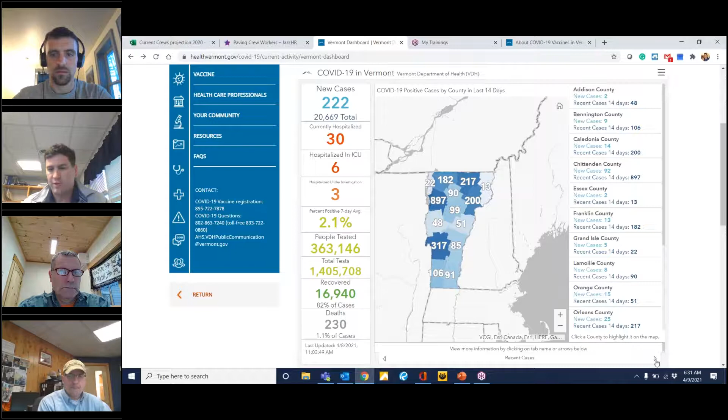Again, anything COVID related, please let us know. Our activity moves very fast. We had like 61 the other day, and then yesterday they reported 222. So again, we just need to follow best practices. The virus is still very active. Just keep up the communication. We're doing a really good job - you have a little situation, give me a call, and we'll come up with a game plan and figure out how to move forward with all the best information and guidelines that we have to follow.

So there's the last 14-day total. You can see we had some peaks and valleys there.

So this week's code of conduct is to strive to maintain a positive and professional image of ECI, of our clients, and of our employees - our employees, our clients, vendors, and some contractors into the public.

Health and safety news, again, excellent job - 7 days without a recordable injury, so we're up to 127. Excellent job this past week. We're doing a really good job with the morning briefings, the JHAs being completed and filled out. And every project that I went to this week, everybody was operating in a safe manner. So keep up the good work with our project site hazards.

This week we wanted to expand more on utility strikes, dig safe, and utility prevention. Again, follow all those best practices that we talked about last week. Make sure that we maintain our marks - we do have marks on the ground. Maintain those marks by refreshing the paint, creating offsets. Again, following that 18-inch tolerance zone, we need to make sure we hand dig to locate and visually see those utilities before we start excavating within 18 inches.

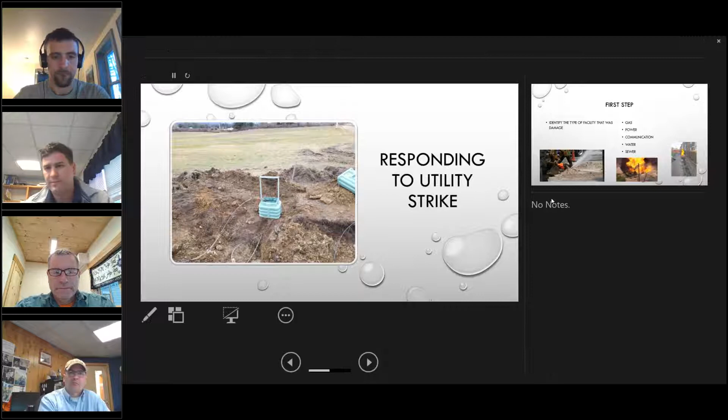You can expand the screen or show the next slide view. Oh, okay, yeah, I'm gonna unplug this. Okay, let's try that. How's that, Ken? Is that better? Yeah, it still shows - it's not really the presentation part. There you go, that's it. Yeah, thanks. Yep. A little rusty doing the safety meeting back in the office.

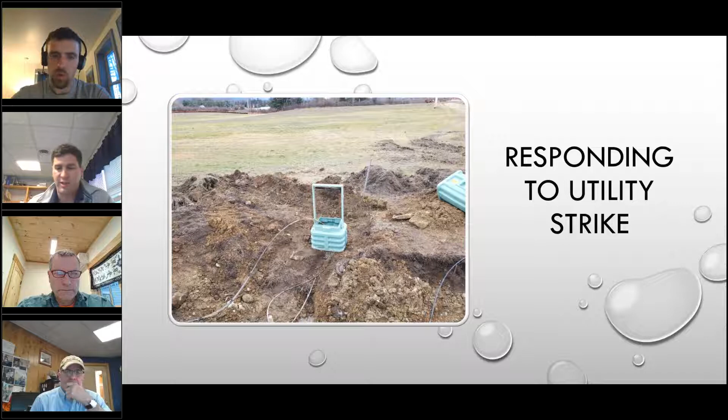Okay, so we've all been part of some unfortunate events, and that's usually what we see - operations kind of get shut down once a utility strike happens. So what we're going to talk about today is responding to utility strikes, how we want to conduct in a safe manner, and also the most effective way for reporting these things.

The first step is to identify the type of facility that was damaged. Most of the time it's pretty easy to know because there's potentially a physical hazard that relates. With a water line, you're going to have potential water in the trench that could create a very unsafe condition in the trenching operations with cave-ins. With gas, there's a chance for explosions. With power, there's potential for explosions. Communication, there isn't really that type of physical hazard to worry about - it's more that we're shutting down people's broadband and creating an issue for the public. And then the same thing with sewer.

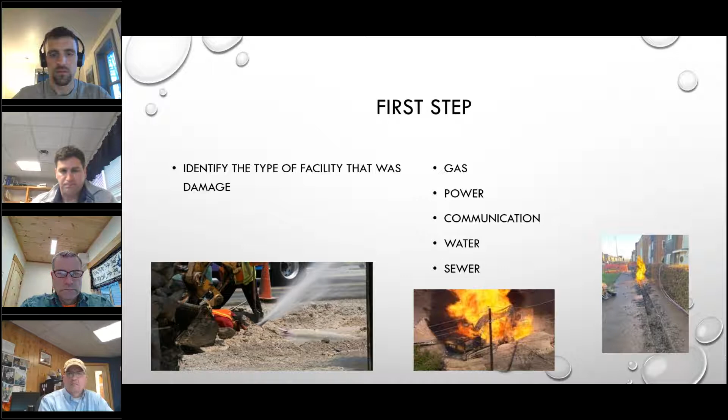So the first step is to identify, and then we're going to talk about our prevention and response. With gas, if a gas line is leaking, move a safe distance away and call 911. If you have the contact for Vermont Gas, call them. Working in Vermont, if we're working in different states, it could be a different gas company that we need to contact. So just know your DigSafe ticket will have all the known utilities in your excavation area.

Follow the internal reporting process once the condition on site is safe and under control.

With power lines, move a safe distance away from the power utility and contact the facility owner right away, and call 911 if unsure. If you don't know whether it's energized, it doesn't hurt to call 911, especially if it's a big duct bank with a lot of power lines. But if it's just secondary site lighting type power, remember not to touch it due to step potential, and you can always contact health and safety. We can come out and do a quick sweep. We do have a couple of simple power detectors you can pick up in the tool crib to keep in your pickup.

Keep all employees and bystanders away until instructed if the power line is de-energized, and then once the condition is safe, follow the internal reporting process.

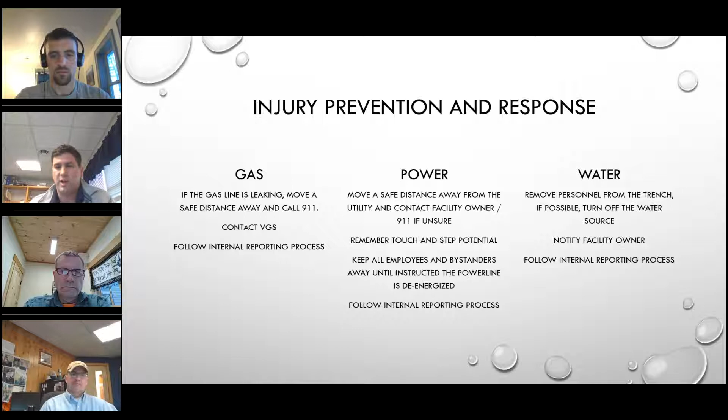Regarding communication lines, we're not really worried about injury prevention, so it's really just getting the area uncovered so we know exactly what the damage is, notifying the facility owner, and following the internal process.

The internal reporting process best practice is, once the situation is safe and under control, notify your supervisor first, take photos if you can, and take more photos. It's important to really get a good understanding of why it happened. Sometimes it could be a marking issue with USIC, and there's some loss control there that we could do to mitigate any future expenses to the company with good documentation.

Once we get the situation under control, remember to complete the digital utility strike form. It's located in Teams under the foreman supervisor channel. If you click the forms menu, you'll see the utility strike form. It's a streamlined form just for utility strikes. So when one occurs, even if it's a near miss, it doesn't hurt to report it so we can learn from our mistakes.

Please take photos, and if you call me to come out, I'm also able to help with that process. We want to make sure all the proper people are notified of the utility strike.

So that's all I have for this topic this week. I'll pass it over to Ken for the next part of this morning's meeting.

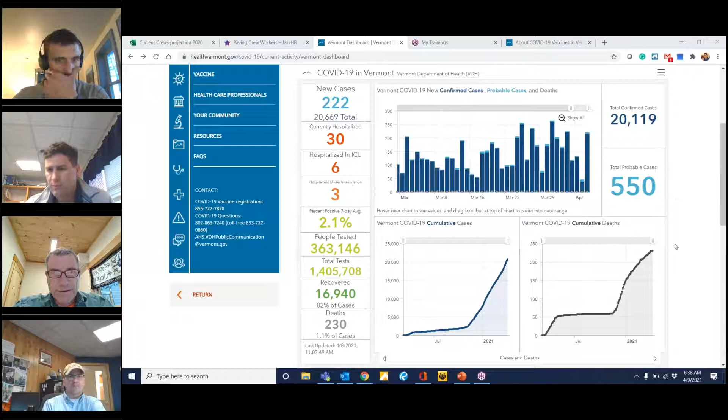Okay, thanks, Matt. I'll switch it over to the screen of the email. Do you see that? Not quite yet, probably. Yeah, I just gave you it. Okay. We do now. Okay, great.

So we've got a pretty cool announcement here, especially for people on ECI's healthcare program. We're announcing a healthcare premium holiday for employees enrolled in our healthcare program.

Employees currently enrolled in the healthcare program will have a zero healthcare deduction for the next 9 weeks, starting with next week's payroll. The premium holiday does not apply to dental insurance, which is a much smaller amount anyway. The premium holiday is possible because of a credit from Cigna, the insurance company, due to better than expected total claims in 2020 - that's what's called loss runs in the insurance world.

ECI last year, the 2020 year, changed over to a level funded plan, which allowed us to capture these savings when they happen without having a negative effect. So that gave us the credit from Cigna. We hope that this also means that 2020 claim performance will result in better premiums for 2022. It should be kind of self-adjusting with the premium negotiations that happen at the end of every year.

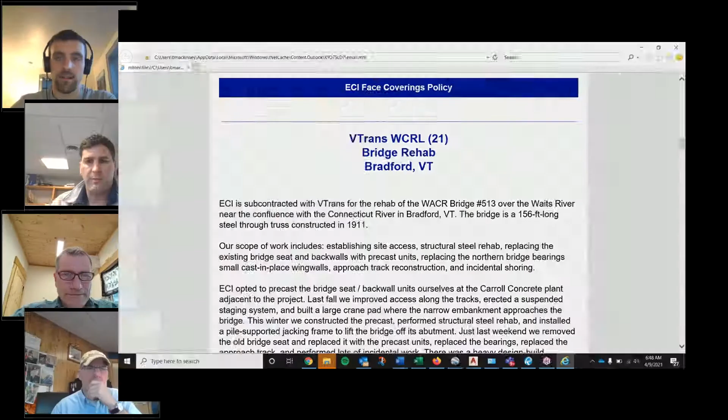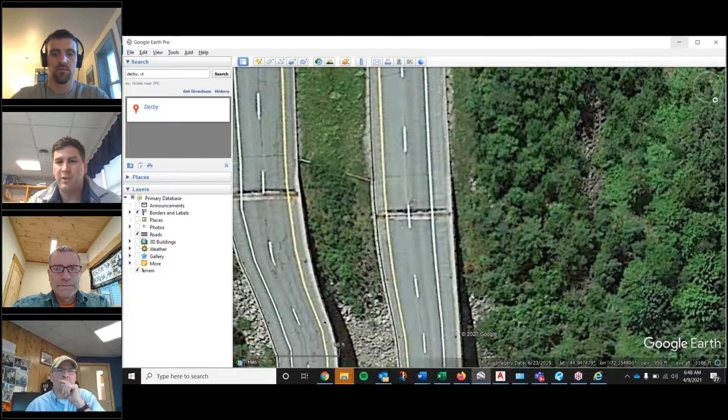Matt's going to have to make you turn you on there. Ben, you all set? No, I don't think we have sound. No sound, yeah. Looks like we're having some audio issues. You're unmuted, but we can't hear you. We can see your screen. That's how you do this. I know if you have a second monitor, sometimes it screws it up too. Can you hear me now? Yes, we can. All right, I'm going to open my browser again. Can you see that? Yep, yes. Okay, guys.

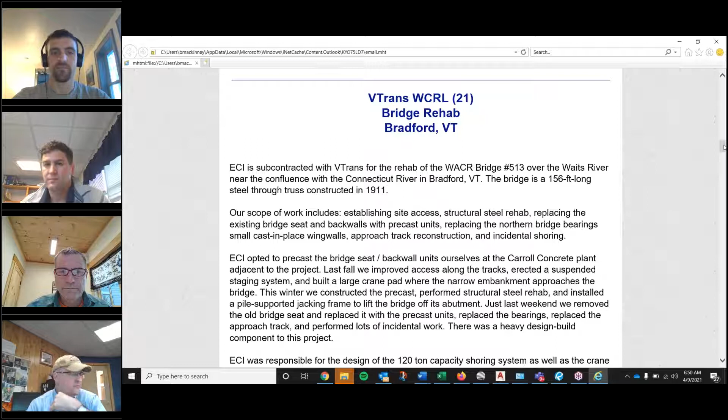VTrans WCRL 21 in Bradford. ECI is subcontracted with VTrans for the rehab of WACR Bridge 513 over the Waits River. This is a 156-foot long steel through truss built in 1911 — same year the Titanic went down, right? Our scope of work includes establishing site access, structural steel rehab, and replacing the existing bridge seat and back wall with precast units, as well as the bearings and some small cast-in-place and approach track work. Zooming ahead, you can see the existing condition of this big steel truss. This is right where the Waits River drains into the Connecticut. It's a nice area, fairly remote — I think 15 or 1600 feet from the nearest farm crossing.

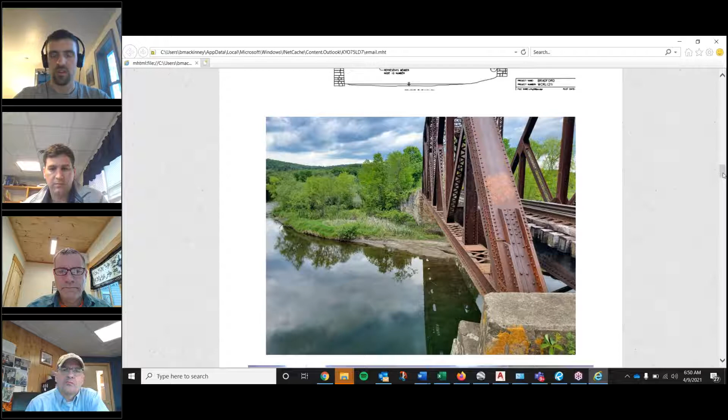So establishing access was significant. We brought in a lot of material to get our crane out there, and we built a soldier pile and lagging crane pad. This is a narrow embankment, 20 plus feet above the original grade of this delta area. So the guys last fall drove steel H piles into the ground, lagged them up with ties, used cables just below track grade across from one H pile to another. Then on the one side with the heavier loading where the crane was parked, we actually drilled tiebacks in towards the base of the wall, because that wet soil was so loose and really wasn't adequate to restrain the bottom of the soldier piles.

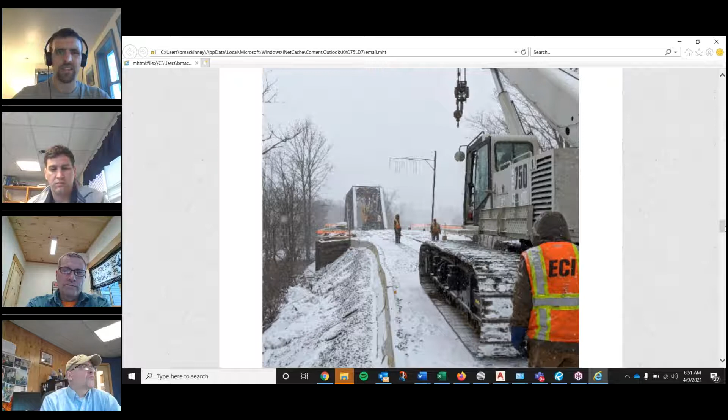Is the audio still coming in okay? It sounds a little choppy on my end. Good, we hear you crystal clear, Ben.

So we opted to precast the bridge seat back wall units ourselves. We rented the shuttered, or mothballed, Carroll Concrete ready mix plant right there in Bradford near our job. We rented that for the duration of the job, and that gave us a great place to make the precast this winter.

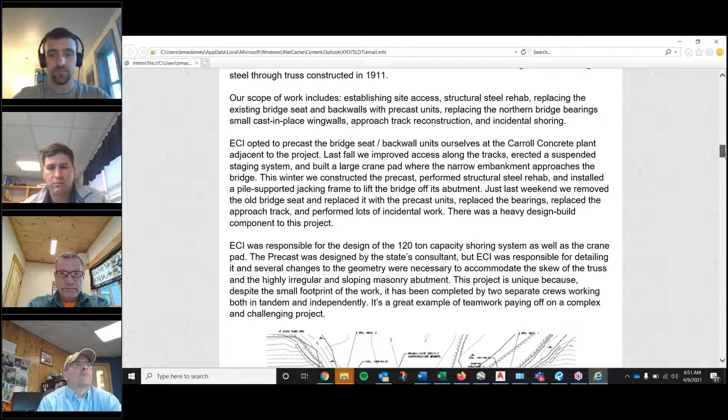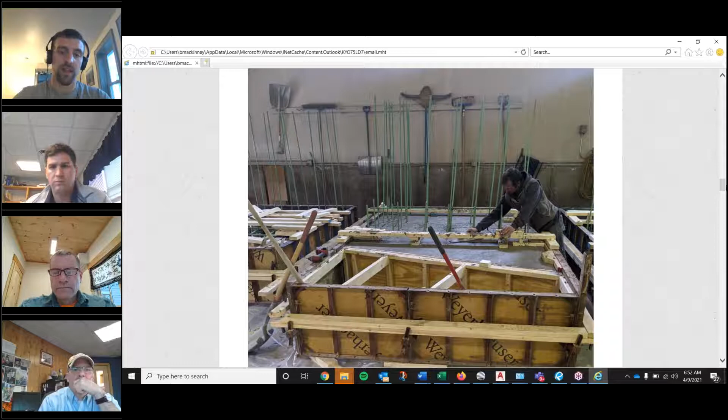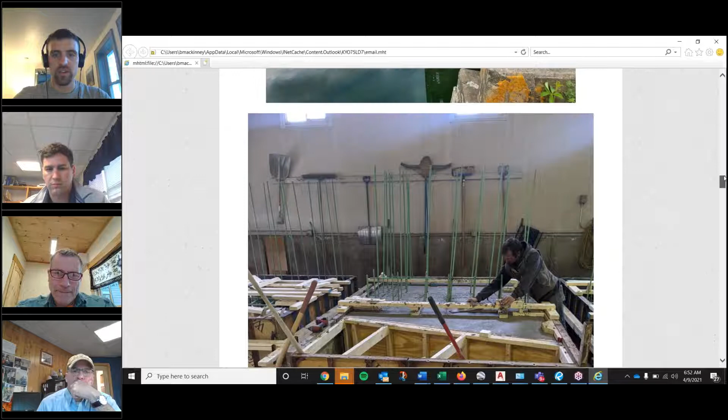There's Jason finishing one of the bridge seats. That's the first pour - secondary back wall and tertiary stringer pedestal pours on those. The heaviest one was about 40,000 pounds. And you can see the unique shape too in that image.

Yeah, so this is a skewed bridge, like a lot of them are, which creates some problems with geometry. There's a heavy design build component to this project, like a lot of our projects. The shoring plan to get that bridge up in the air so we could actually replace that bridge seat. The demo, the erection, that's always designed in-house by us.

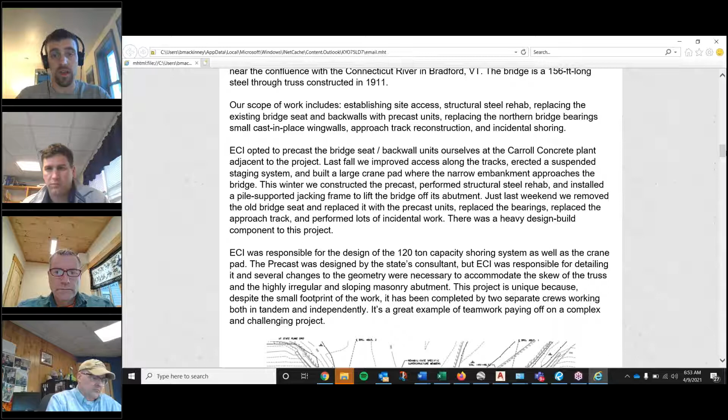The design of that crane pad, that relatively heavily loaded crane pad. But even for the precast, which was designed by the consultant, because of the geometry of this skewed truss and the stringers that are also landing on it, in addition to the truss chords themselves, and the grades, and making that all work with this very irregular construction - there was, it took a lot of survey, a lot of CAD work, and a lot of work by a bunch of different guys on our team to make that work, and it fit quite well.

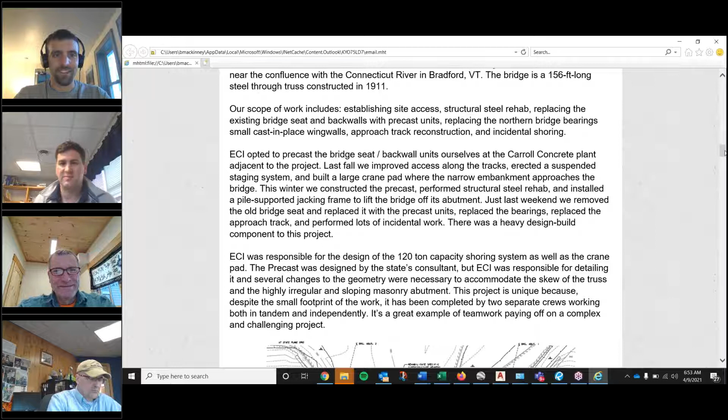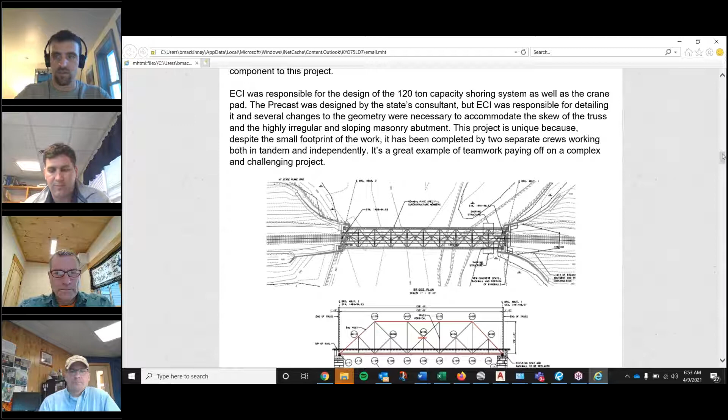And the pieces came right together in the field, right? Yep. Good. So this winter we built the precast, and just recently we were out there on a 5-day shutdown getting everything installed. Just zoom ahead. Here's just a plan and profile view of the bridge.

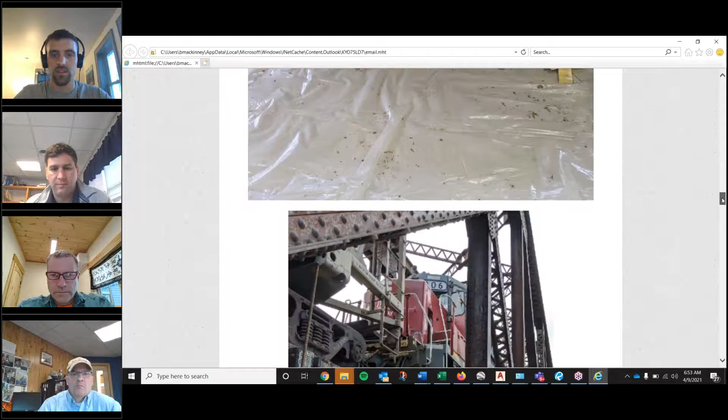Here's the first train over. Our suspended staging system that we've been using, that works very nice for access, especially for the steel work that we've been doing, and that we had a fairly minor scope of steel on this job.

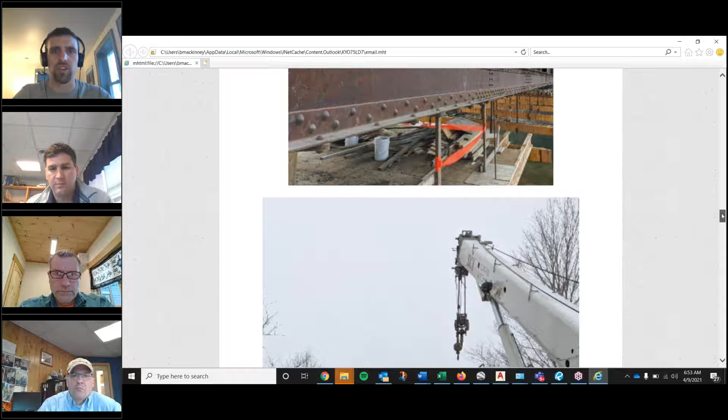So to jack the bridge, we drove H piles down on each side, slid in a jacking beam underneath this panel point here - I'll call it a panel point - underneath those vertical members, and then jacked it up with hydraulic jacks.

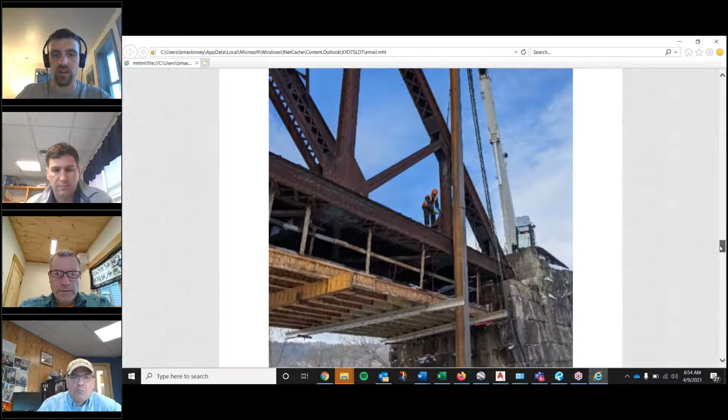There's some structural steel rehab on a floor beam top flange. Here's a view during the shutdown. We're rigging the first bridge seat. You can see the bridge up in the air, jacked from this jacking beam here, and a substantial amount of demo that's taken place on the original abutment.

The really marshy soils - we've actually noticed some significant movement in this whole masonry existing construction since this shutdown, which isn't really on us, but it's still probably problematic for the state. So we're waiting to hear back from the state on how they want us to address it. All of our work is holding together quite nice, but they've definitely got some longer term issues they're going to need to advise us on.

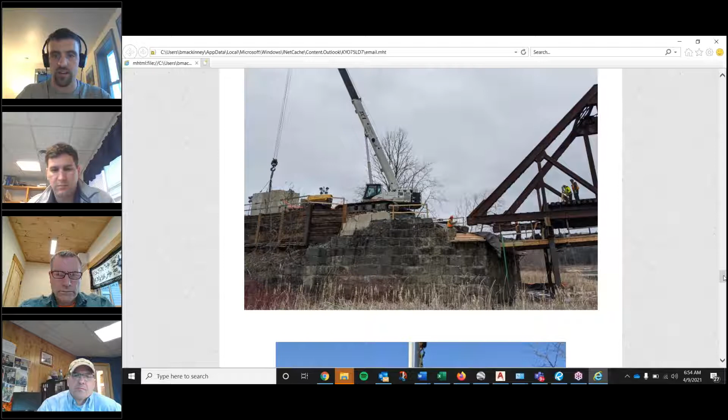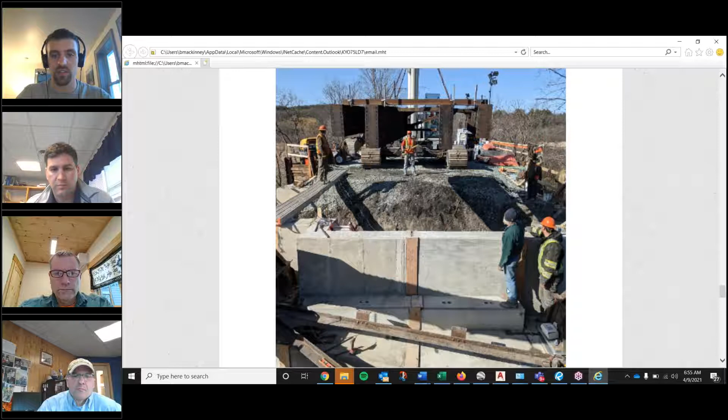Here's the approach stringers going back in towards the end of the shutdown. You can see the new back wall bridge seat units are all in. There's the stringer pedestal there that they'll set on. You can see some forms here just for grout, for shear key grouting. You can see that back wall's got that significant jog in it there to accommodate the skewed geometry of the truss chords.

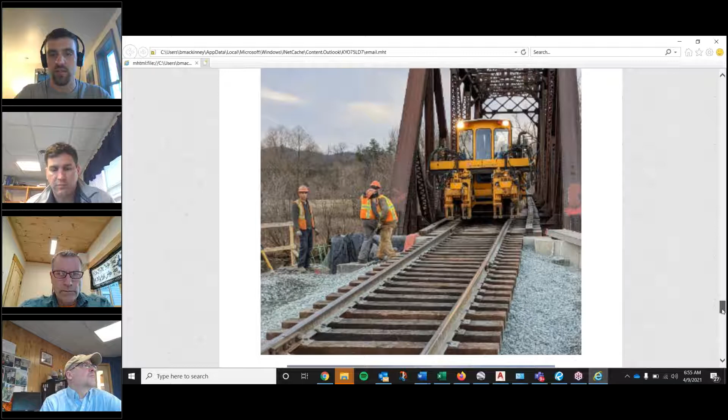And here's the approach track in with the tamper in place, ready for ballast and the cribs to get surfaced up. One thing I think that's really neat about this job is that, pretty much start to finish, we had two autonomous crews working on it, sometimes together, sometimes separately. And it was, I think, a great example of teamwork.

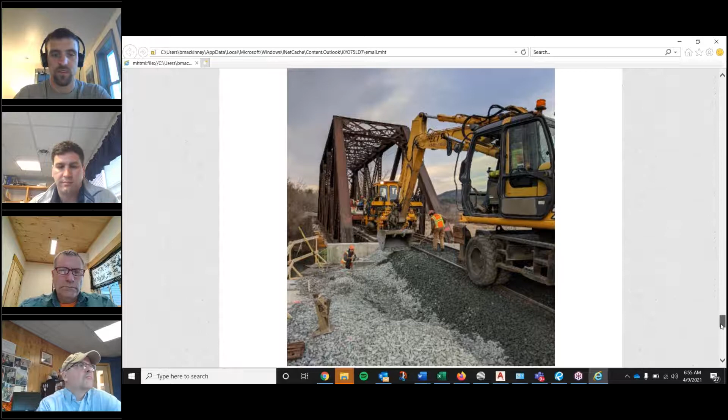Yeah, that looks like a heavy bridge. Yeah, it does. We got some tough guys though. Is that the VTR or is that the Green Mountain? At Green Mountain. Yep.